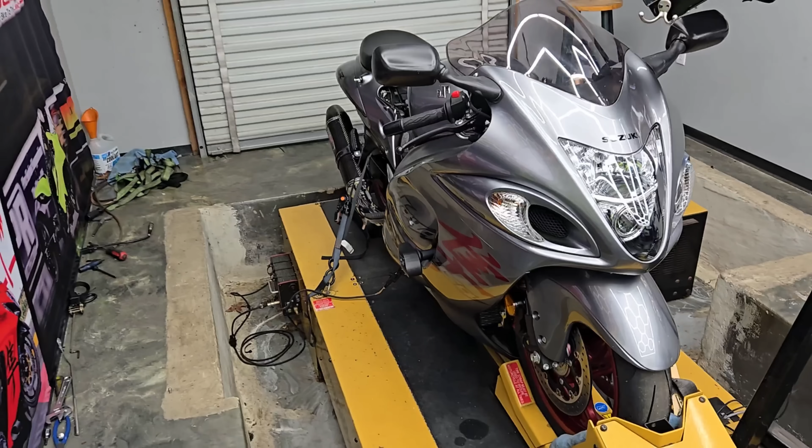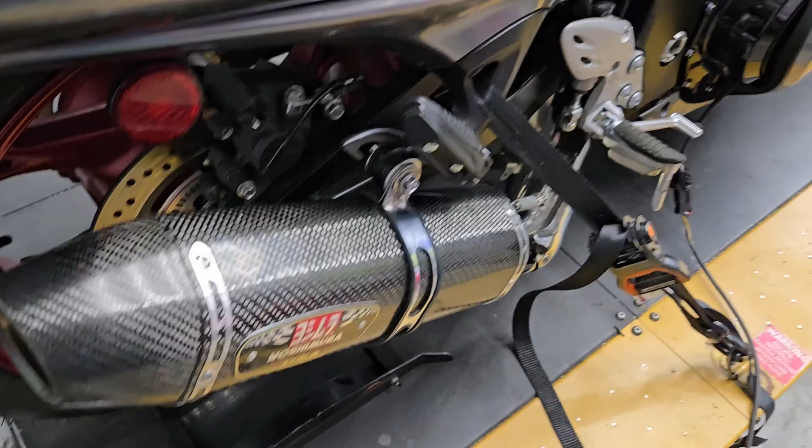For those of you who don't know, my name is Chris Moore, and in today's video we got a Gen 2 Busa on the dyno. Finally, another Gen 2 back on the channel. I feel like it's been nothing but Gen 3 city here lately, but here you go, Gen 2 fans. We got a super clean one in here for you, with a Yoshimura dual slip-on exhaust. We're going to be installing a Woolich Racing Quickshifter, a sprint air filter, some velocity stacks, and this little guy right here. We'll show you more here in just a second. Stay with us.

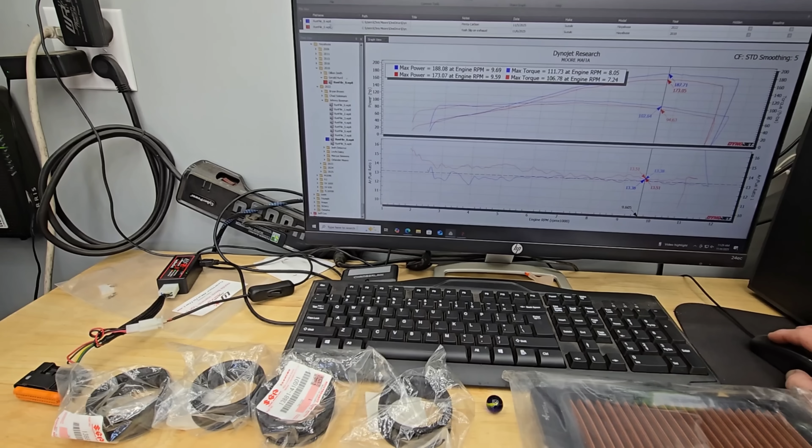Let's take a look at our baseline numbers and see what we got. We got another bike on there that we got to delete - this is one I did yesterday. Let me delete this run. Delete, and there is our run from our Busa.

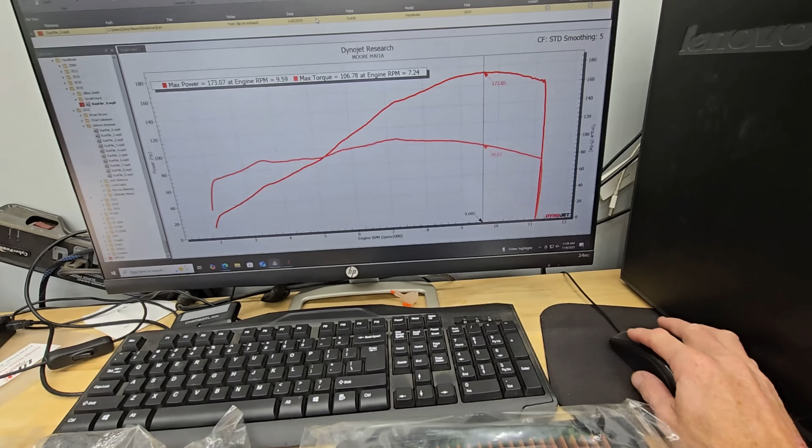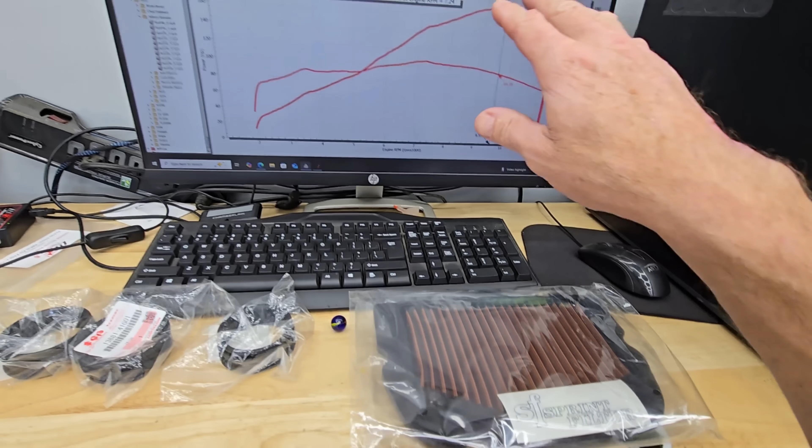You see 173 horsepower. The horsepower goes up and then it rolls back down. So we make peak power about 9,500 RPMs, 9,600, somewhere around in there. Between 95 to 99 it's about the same, and then the power starts to roll back down. So the modifications we're going to be doing will, for one, increase the horsepower, but two, they're going to make this power curve go a little straighter. So instead of it rolling back down, we're going to try to maintain it and keep it going up at higher RPMs.

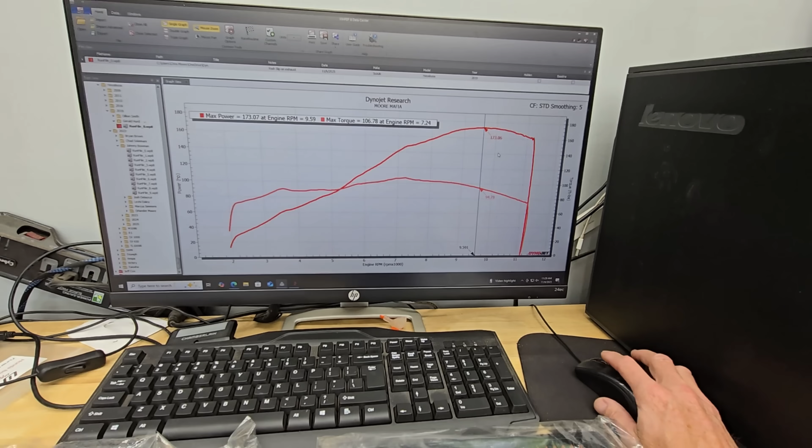Now, this customer is going to be riding this bike on the street, enjoying it, but he's also getting into drag racing. He's going to be going to the drag strip, doing some launches, doing some practice with this thing, and going fast the legal and fun way.

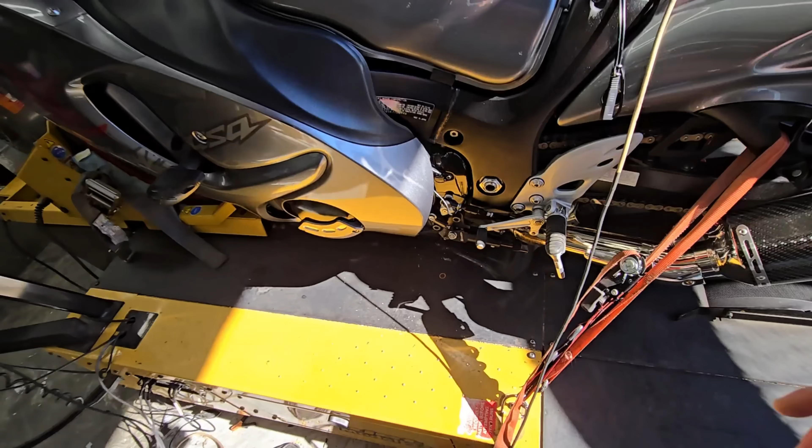Now you can see here we've already got the Woolich Racing Quickshifter installed. That little gizmo right there is all there is to it. That gives us clutchless upshifts. So you can hold the throttle, maintain the throttle on, and just click the gear up, boop, boop, boop, boop. Wide open, going slow, whatever, the bike is going to have clutchless upshifts just like the new Gen 3s.

Now that add-on itself costs around 500, a little over 500 bucks with your ECU flash, as an add-on. So a couple little upgrades that we're going to be able to do to make this more like a Gen 3 without cutting that big Gen 3 paycheck.

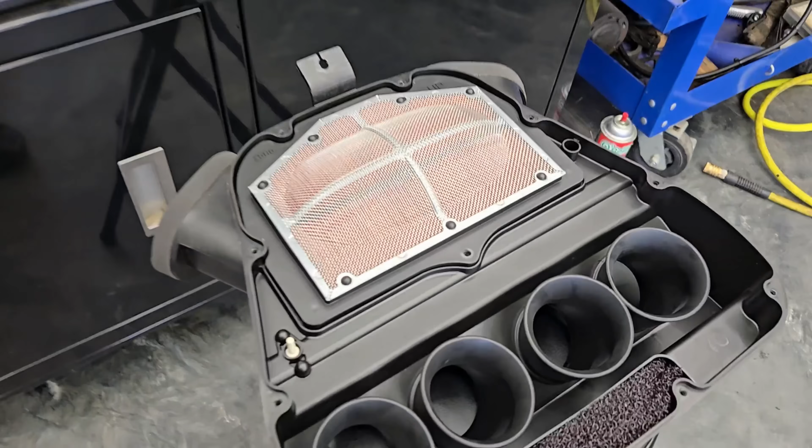And just like that, the Busa is tore down. So it does have a 100% factory air filter and 100% factory velocity stack. You can see the velocity stacks are all fairly tall. All these ones we have here are very short. So we're about to install these, and what this is going to do is change our power curve.

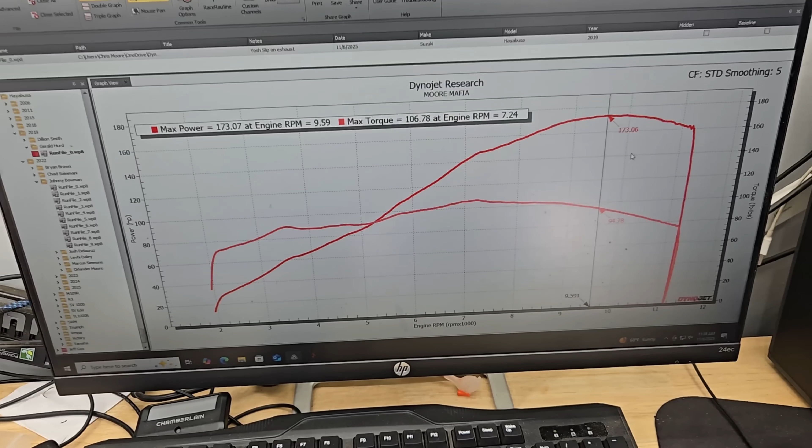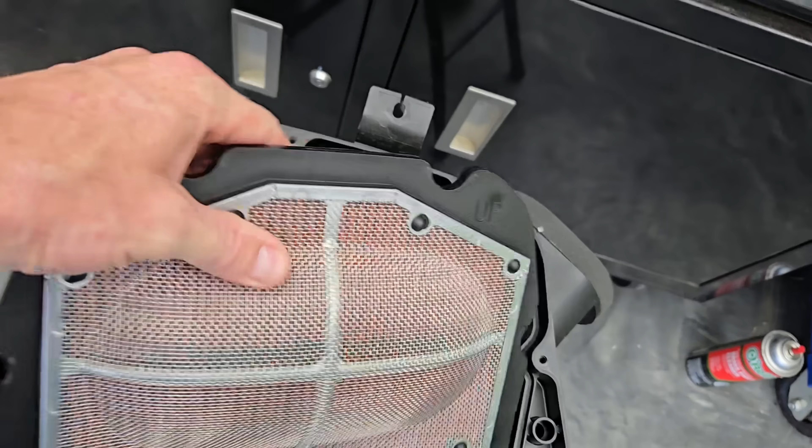We're going to lose a couple horsepower, maybe 2 or 3, right around 6 or 7,000 RPMs. But we're going to extend our horsepower out 5 to 7 horsepower in the upper RPMs. On a Busa, we don't really need a lot of mid-range - the bike has tons of mid-range from the factory. So if we lose a little bit, that's not a big deal because the bike wants to wheelie - we got more than we can use anyway. Factory air filter, trash can, and this Sprint air filter is gonna be a big airflow upgrade.

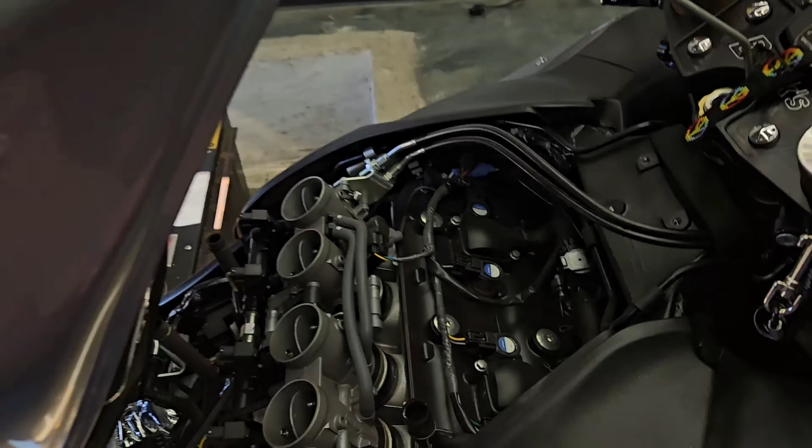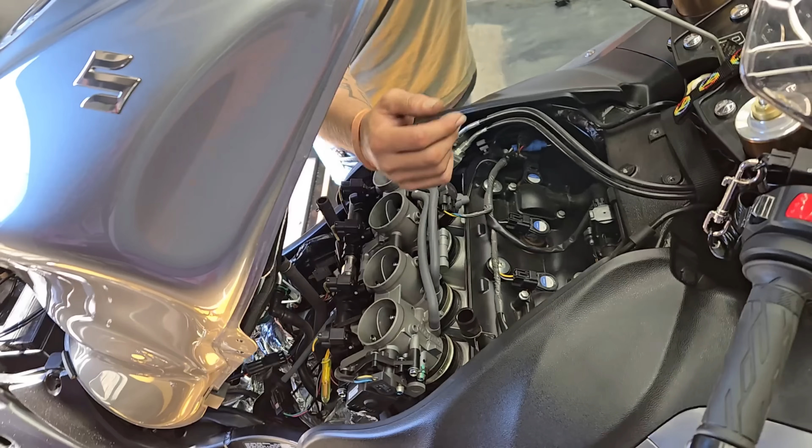Now let me show you what we're gonna do with this marble. This is your factory PAIR valve system right here, these little caps, and then you see they got a hose, and then you got this solenoid. There's a hose that comes off that solenoid and attaches to the air box. We're gonna take this marble and simply shove it down inside this hose, then put that hose back on the air box. We'll do all that stuff and run it again to see what kind of power gains we got.

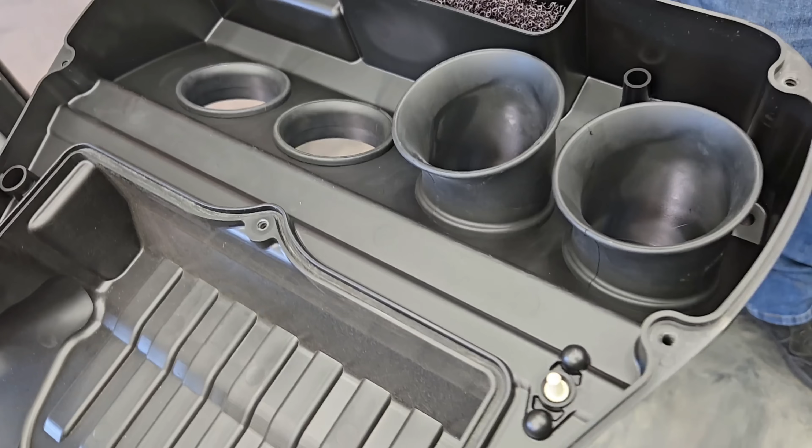Velocity stacks have been installed. You can see how short they are compared to the factory ones. This is a super simple, easy installation, you could do this yourself at your house. If you wanted to buy these, hit us up at mooremafia.com. We keep them in stock, but you can see the big tall ones are out. We're about to put these other two in, and we'll be ready to run here in a second.

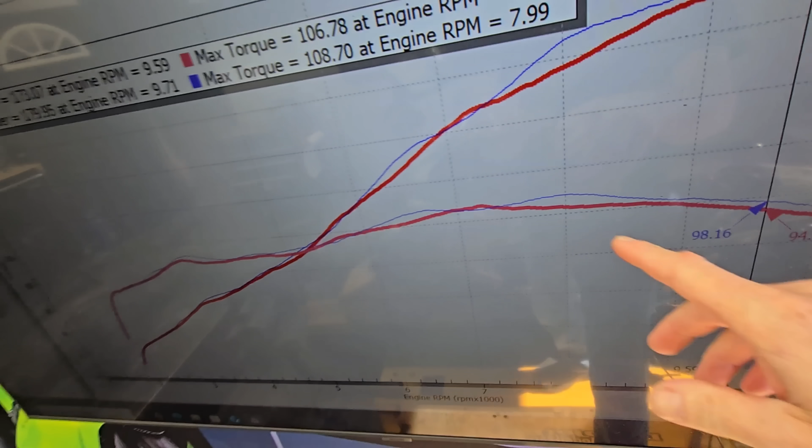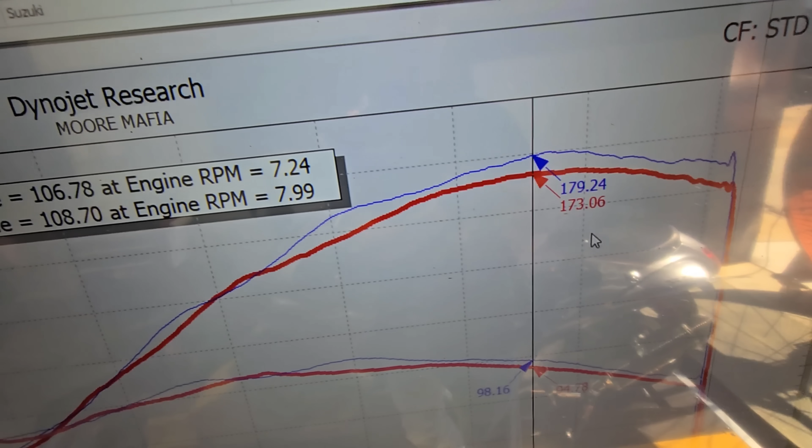Just like that, we got some really, really nice gains. So as expected, we lost a little bit here and there, but for the most part we gained everywhere else. So the blue line is our current line. We just went to 179 from 173. This is no tuning, no nothing.

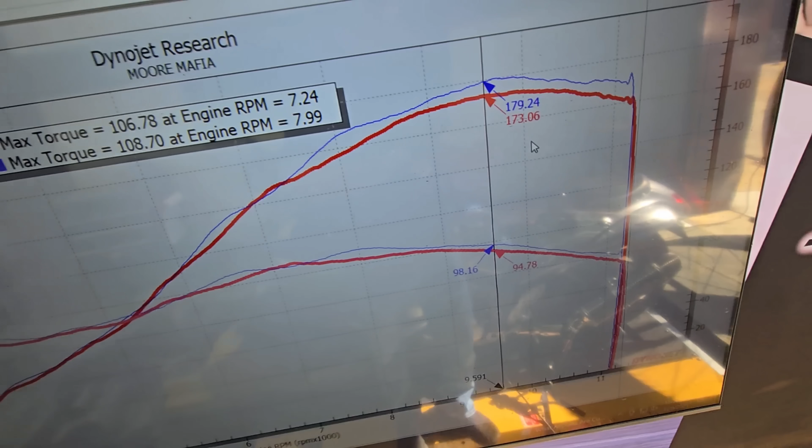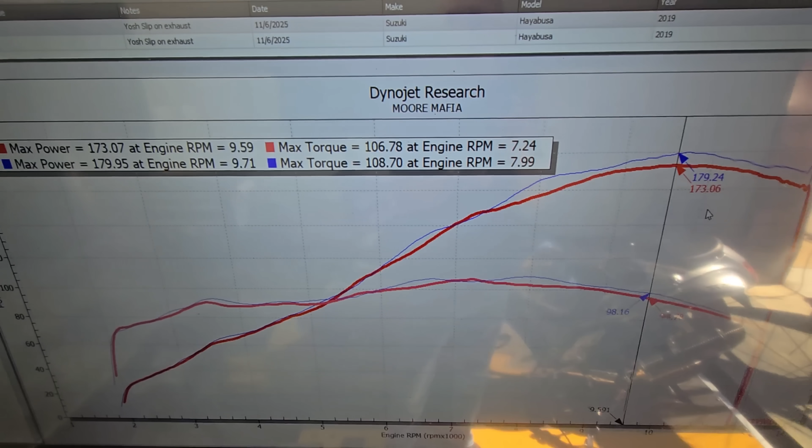Now we do need to change or tweak our tune. We didn't have it perfectly tuned to start with, this was just an ECU Flash that we had put in there for the slip-ons, so that was the baseline run. Now we've got to fine tune and dial all this in with our new modifications, because our air fuel ratio is definitely gonna be a little wavy. We've changed our flow a lot, so we gotta change our fueling a good bit to go with that.

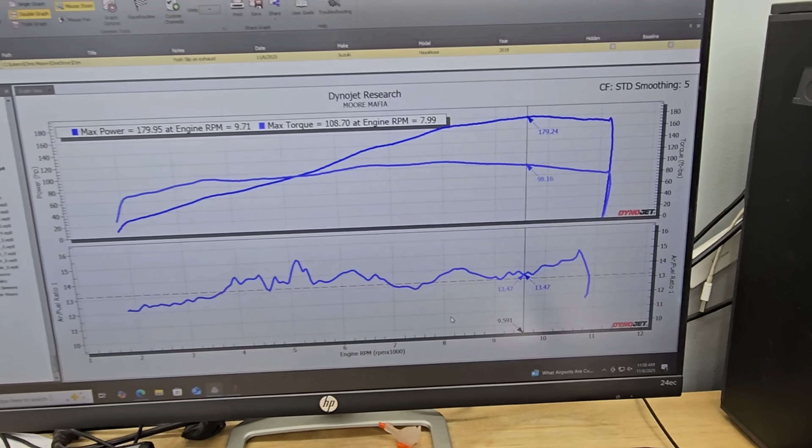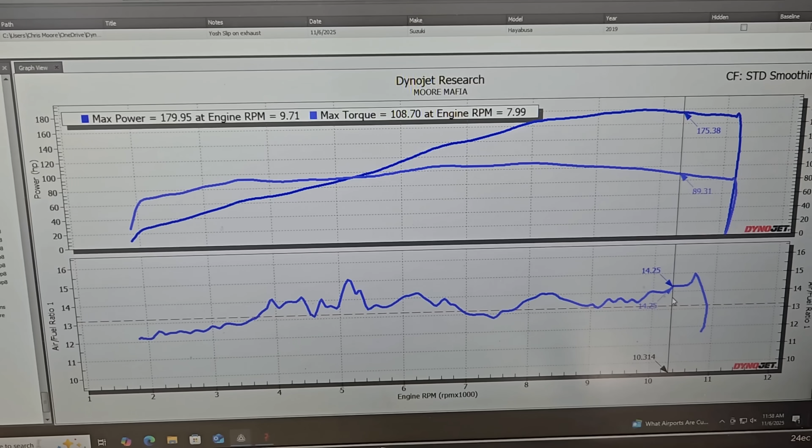The fueling, here it is. You can see that the thing goes super lean on top end. Now that we have changed the velocity stacks, that's why our horsepower hasn't picked up much up there like I told you it was going to. But I'm gonna fix all this stuff and smooth it out.

Here we go guys, it should be time for what should be the final pulls. The tune is dialed in, the air fuel is perfected. Check out the Quickshifter too, I'm gonna show you it. I'm gonna run it up and down through the gears and show you the clutchless part. Really cool, but listen to how nice and clean this Busa sounds, and it's making great power.

We're going to talk about the difference between the power in the Gen 2 versus Gen 3 here in just a second.

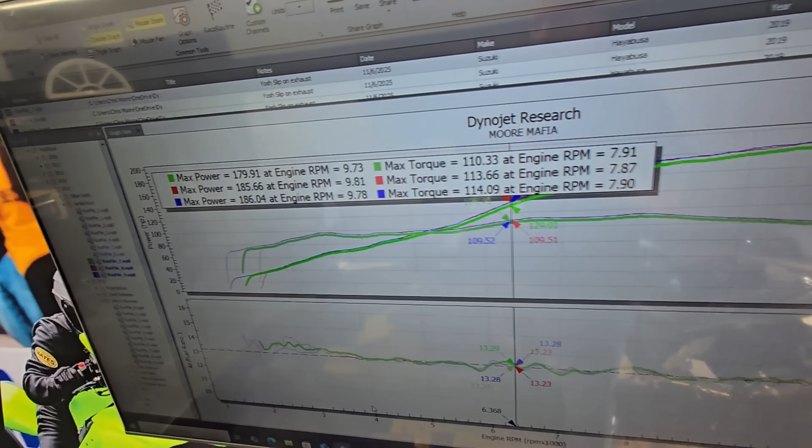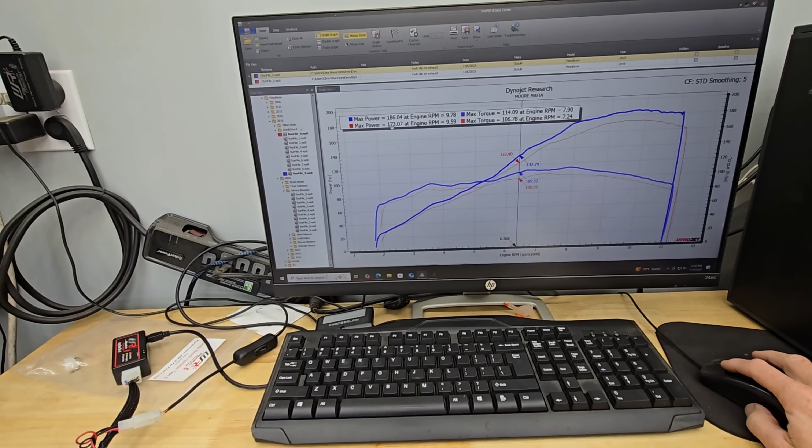Let me get all the runs simplified on the dyno graph so you can see it better, and then I'm gonna pull up the before and after when we did all these mods for what we've gained so far in today's project. Look at our gains, we started with 173, we ended with 186 at 9,800 RPMs. You can see we went from 173 to basically 186. Here at 8,000 RPMs... why is it not this thing in the way? Hold on, let me back this up.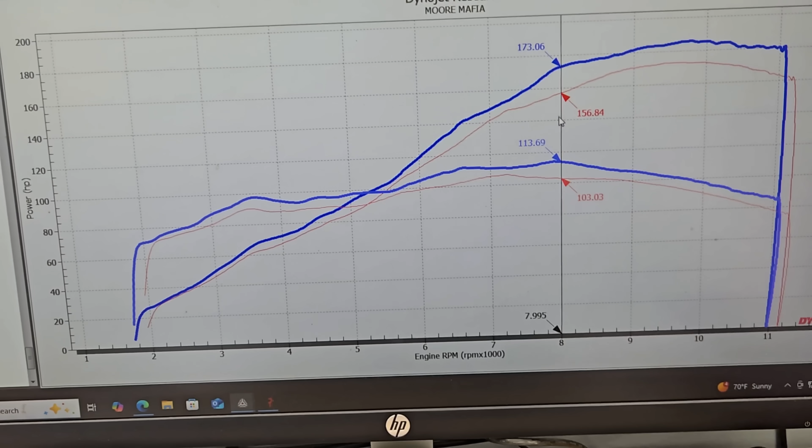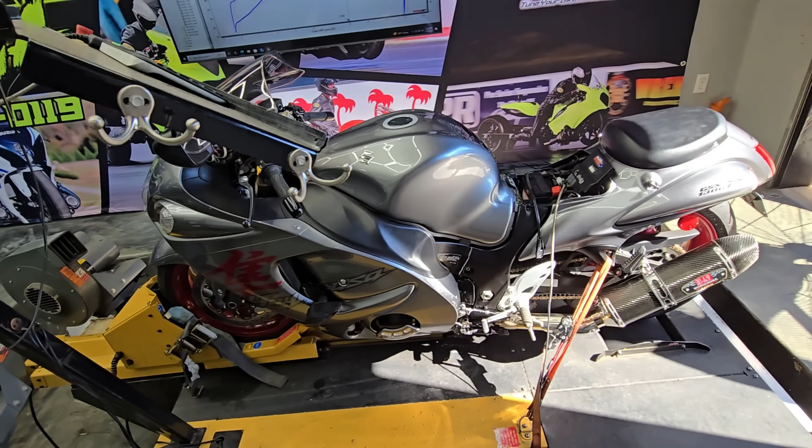We went from 156 to 173, massive gains. So after tuning, we were able to tune out the power loss of the stacks. But I think overall, if you have a perfectly tuned stock stacks versus perfectly tuned short stacks, you're definitely going to lose 1 or 2 horsepower there around 6,000 or 7,000 RPMs, like we showed in the original graph. But overall, with tuning, this thing is super, super good.

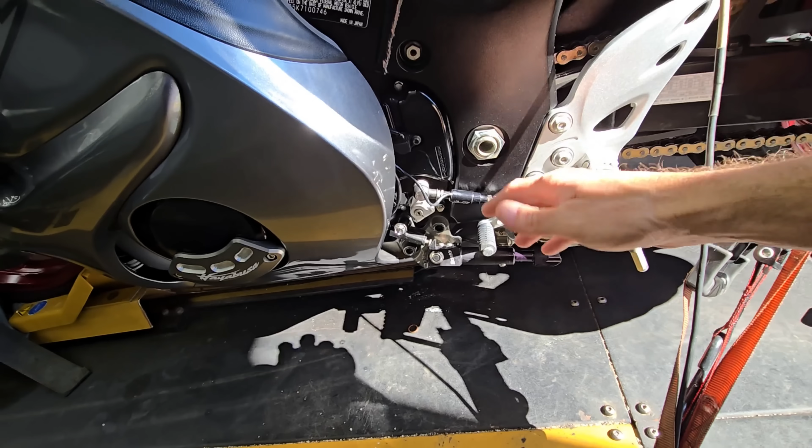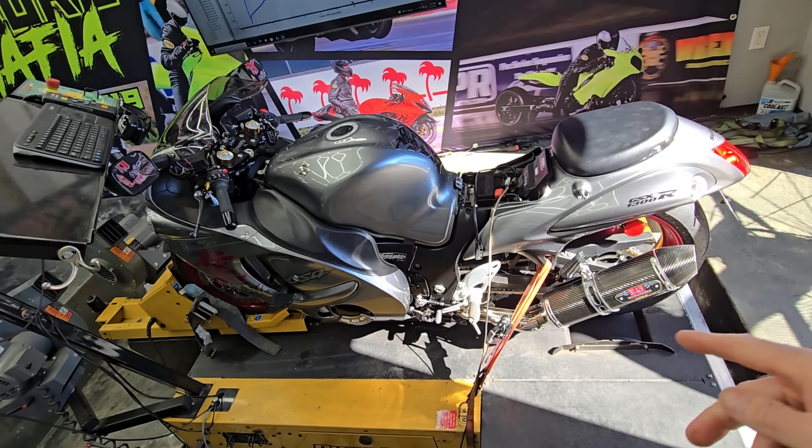How did you like the sound of the clutchless upshift and downshift? That sound, I'm sorry, clutchless upshift only, not clutchless downshift, guys. You can only get clutchless downshift on bikes with electronic control throttles. The Gen 2 Busa, that is not possible, so there is no auto blipper. Now you may find a shifter that will kill it going down, but it does not, quote unquote, have an auto blipper feature, and I do not really recommend adding that to one for a bike that doesn't have it. I don't know, it's hard on the transmissions. But upshift, no problem, no loss of reliability whatsoever.

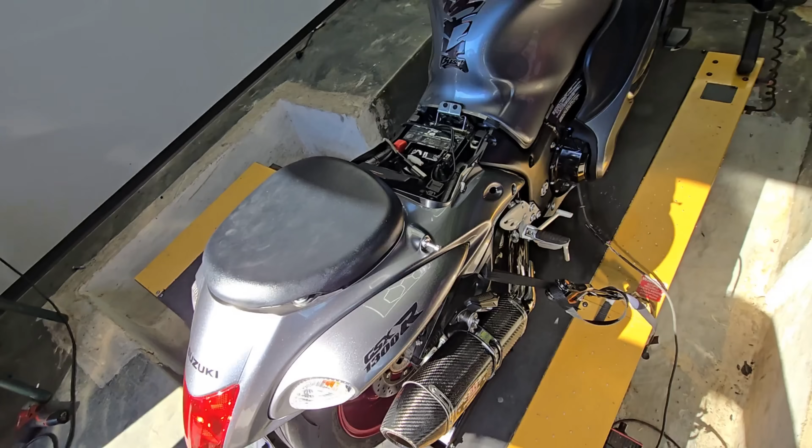Overall, this Busa looks super, super good. And did I mention she's still got under 1,000 miles?